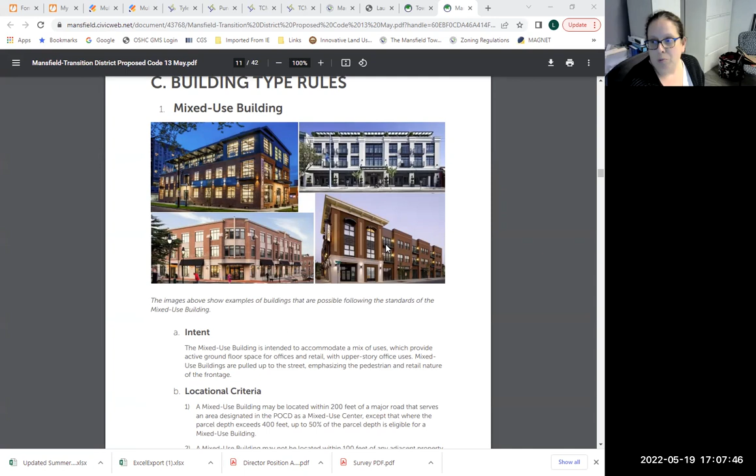So this gives you an idea. These are some of the photos that they provided of potential, you know, what a mixed use building might look like. And then they go into detail, and so these diagrams and the dimensions help with massing and scale and tell you where your buildings should be located.

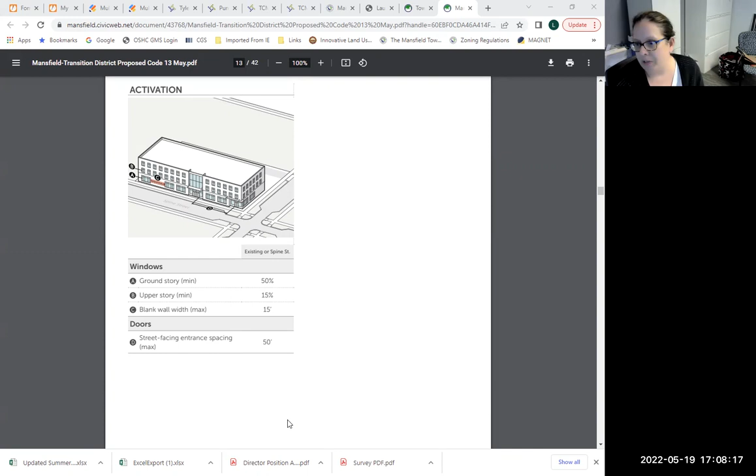In this case, 50% of the ground floor would need to be windows. So you start to get some of these design perspectives so that you're not creating blank walls facing the street, for example. And you have to have entrances and doors, things of that nature.

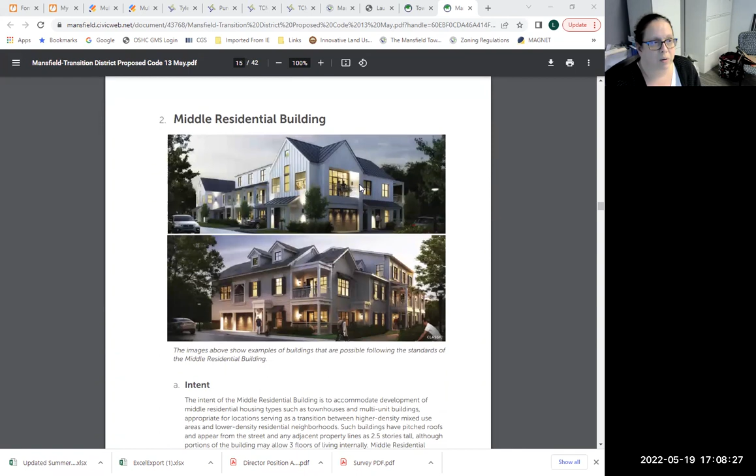So the middle residential building, this gives you a little bit of an idea. You can see this would be much different from, I would say, rows of 4-story townhouses, which is what they had been contemplating, that all would have garages on the first floor. So trying to make this look a little bit more residential, keep it lower scale, given the abutting residential neighborhoods, and they've given a few examples.

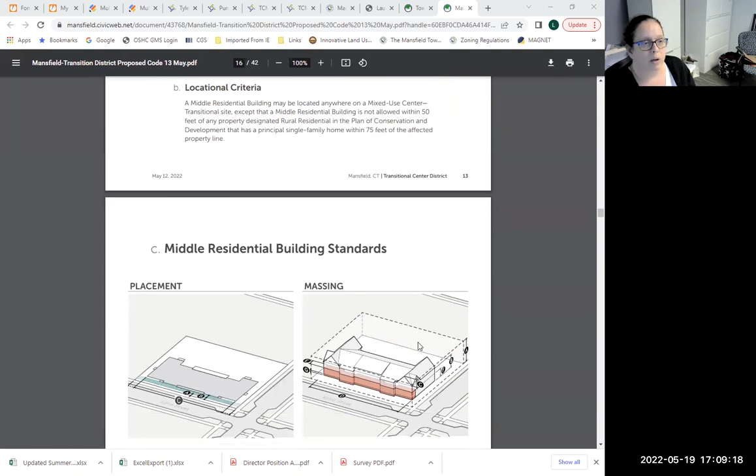So some of these units might have attached garages, some may not. And I think one of the things from the goal that we've had of trying to focus some of our housing design on non-student populations, I think we're hoping this may be going in that direction, where you now have an opportunity where you have a front door and a garage, something that may be a little bit more appealing to a professional or a family, to have that kind of private entrance, as opposed to just being the more intense model where you're a doorway off a hallway in a larger building.

Steve or Linda, can I ask a quick question?

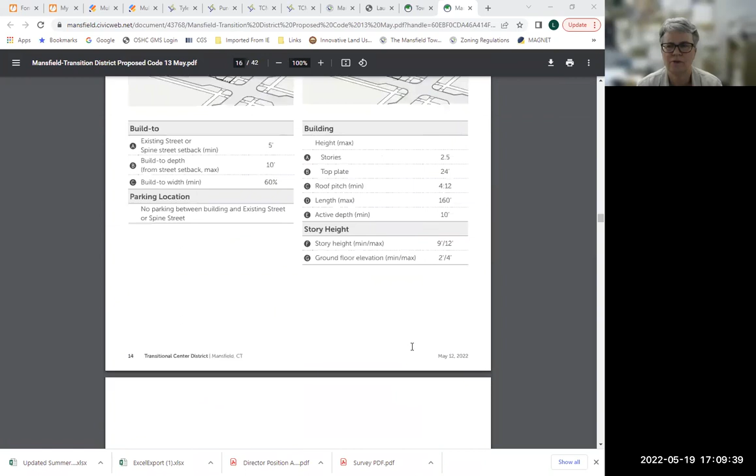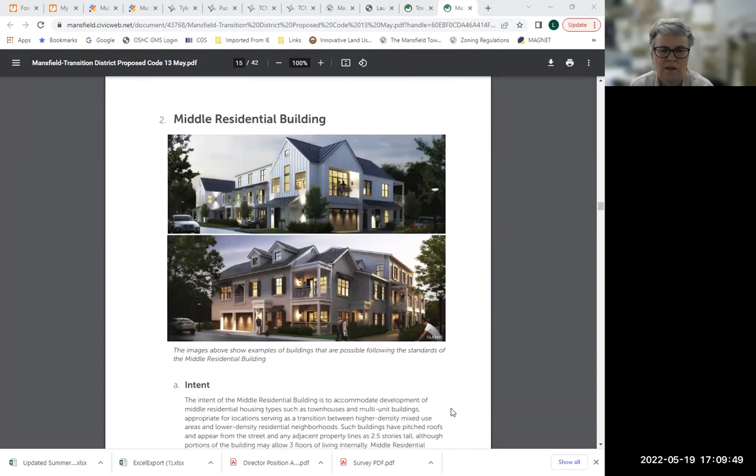Yep. So Linda, going back to the photos, and I know those are just photos, let's take, for example, the one on the bottom. Like how many apartments could potentially fit into that? I don't know. Okay, and that's something we'd have to ask them.

And I will tell you that one of the concepts that the committee discussed with the applicant was this idea, something we're seeing in terms of best practices for missing middle housing, which is focusing less on a density number than on the form, and basically saying, if you limit the size of the building.

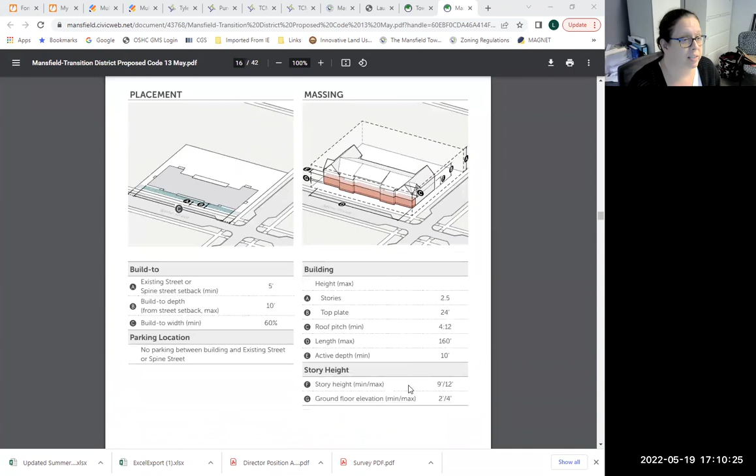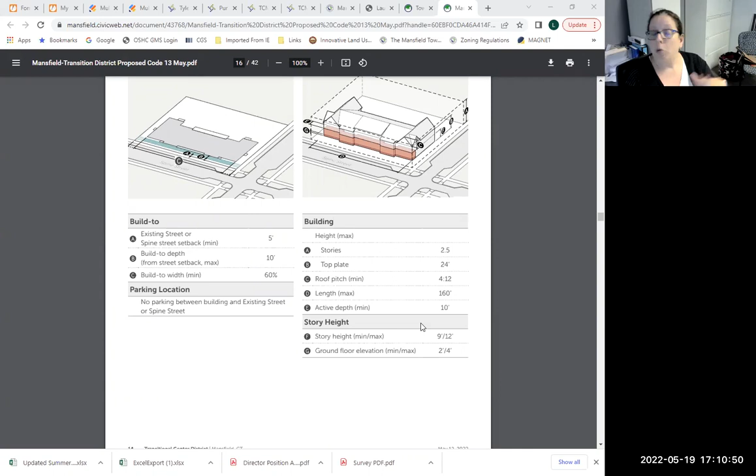So in this case, one of the things, and again, I have not looked at this, so I wanted to see if they have a maximum length. They don't have a maximum depth, so we'll have to see if density comes along with this. But one concept with missing middle housing is to say, if you outline your envelope and say your building can be no more than X feet wide, X feet deep, and X feet tall, you can put as many units inside that envelope as you want, because we're controlling the mass and scale.

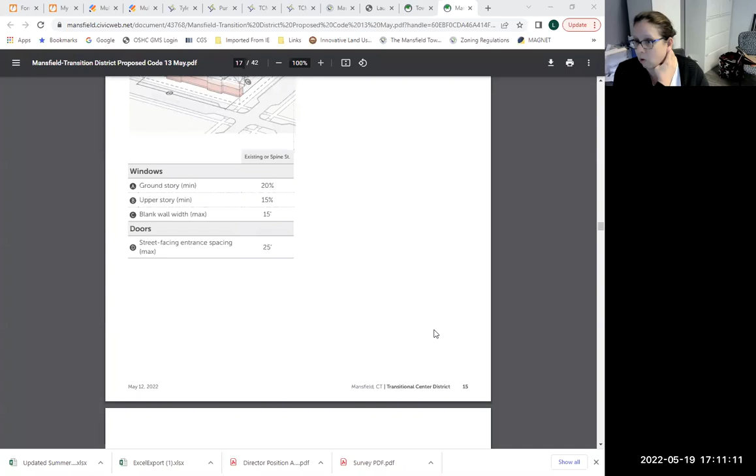So I don't know what they're looking for here, and I haven't had a chance to go through this yet to really dig into density and other things. I will say the town is hiring a consultant that's going to be working on our overall rewrite. The Planning and Zoning Commission authorized retaining them for peer review of this, because this is definitely very new for the town. So we want to get their input on how they think this works. And the fact that I'm not going to be here to review this is another reason for that.

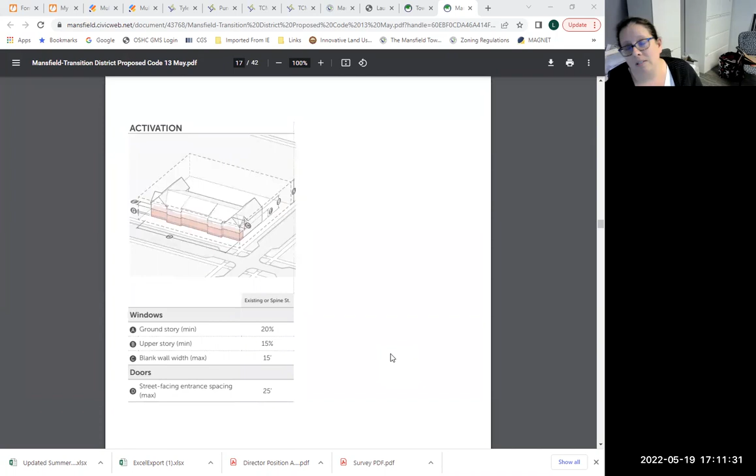Thank you. Thanks, Cynthia. I was wondering whether.

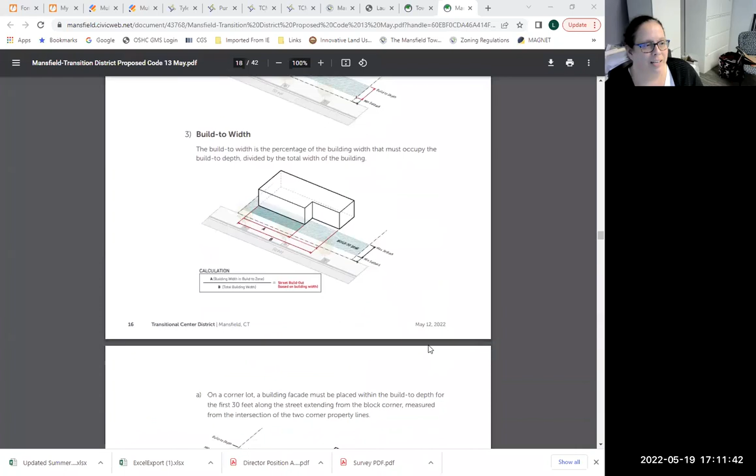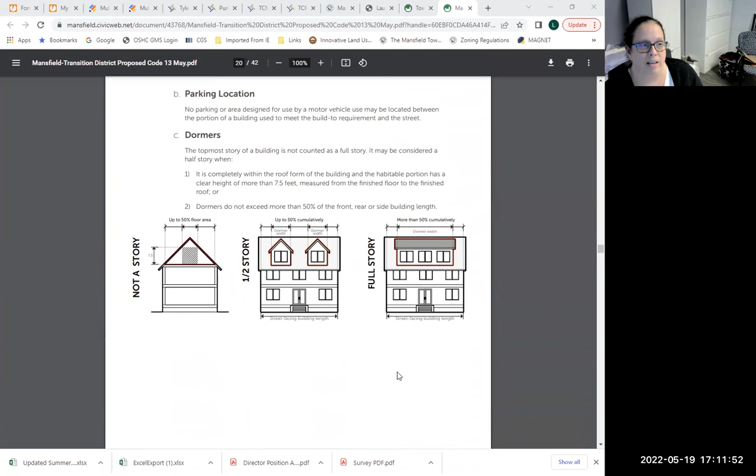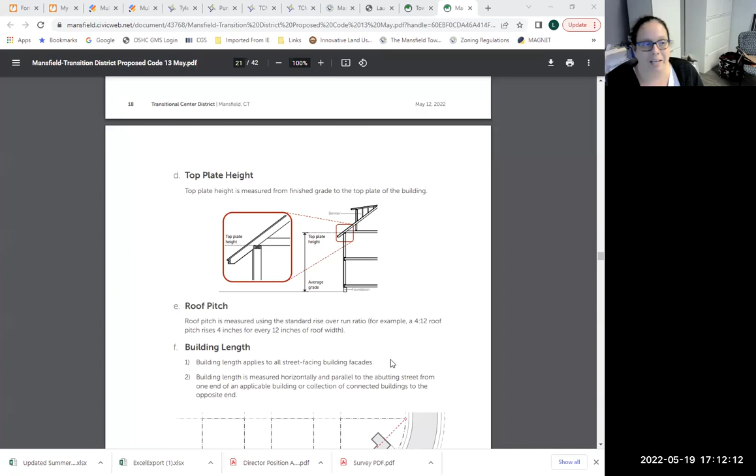So you can see it's also a very graphic document that gives a lot of detail on how to do different things. And I think one of the things that will maybe be appealing is it's going to provide a developer a lot of guidance and clarity in terms of here's what you need to do. By spelling all of that out, this is 42 pages for one district, so it's not short, but at the same time, it's providing somebody with the detail of what they need to do.

I don't anticipate the public hearing on this being until July, so I think there's going to be time to dig into this.

When we met with the applicant, the regulatory review committee said, if you want to come up with this district, great, but we think at this point you should be focusing on the Four Corners transitional districts. So when they come in to actually map the district, they may be working with other property owners to ask if they want to join into this district, so that we're not just doing one 20-acre lot, but actually looking at other parcels that have that same designation.

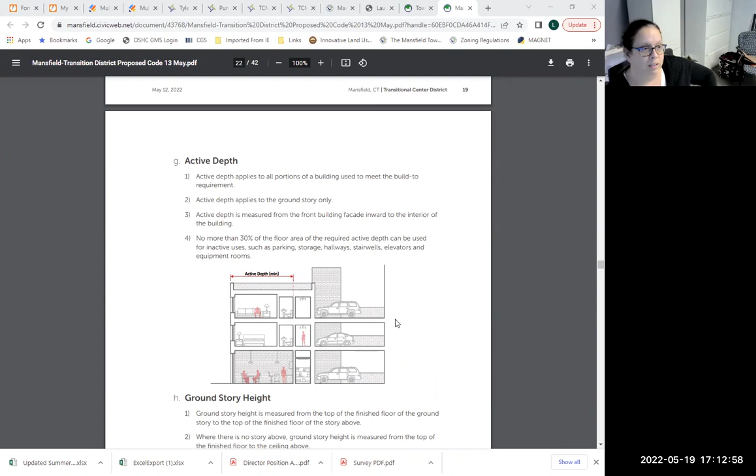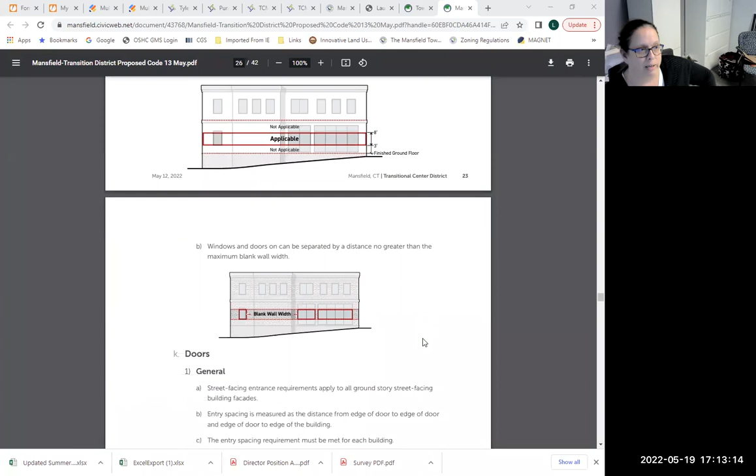Any questions? Again, this is a lot to absorb, and we literally got this last Friday when we had to publish our packet, so we haven't had a tremendous amount of time to go through it at this point. But I have two.

Obviously I haven't read through this in great detail, but is there provision for different densities, or more massing, closer to the property line versus further into the parcel? And maybe different massing adjacent to Timber Drive versus 195? It might be more appropriate to have a 1.5 or 2-story building next to existing houses, whereas if you're along 195, maybe you could have a bigger building because it would match what's going on across the street a little bit better.

I'm going to have to dig into it. I think just by the very nature of the mixed-use building, they're definitely looking at a 3-story height maximum. The intent there is that we'd actually be very close to Storrs Road, similar to what's going on across the street, so that building would be brought forward, and there would be no parking between the building and the existing street.

They're also introducing the concept of what they're calling a spine street, so that if you have more than a certain amount of frontage, I think it's 300 feet, you need to basically include an internal street for your project. And that's how a lot of these requirements regarding massing, windows, and doors work, by saying, okay, you're going to include this.